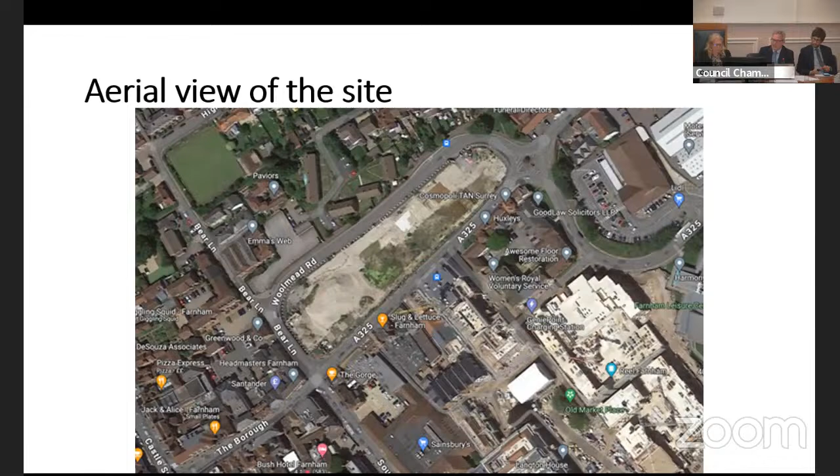As a result, amendments have been made, and these are the proposed amendments to the 106, to the deed. So what we have in front of you all are hard copies of the plans that have been agreed by the district, working with our county council colleagues, county highway colleagues, also Crest Nicholson, but also working with Farnham Town Council and the Farnham Society over how it all works.

These bullet points in front of us are the changes in the deed itself: relocation of the bus stops, widening of the footways to 3 metres in areas and an associated narrowing of the highway, in what will be a one-way system running east-west through East Street, provision of cycle parking for 16 cycles, provision of a 2-metre loading strip for delivery vehicles, retention of the existing controlled crossing, provision of new signage, which you'll see in front of you on the last sheet, and the reinstatement of yellow lines and/or white lining.

We got a late submission, it's in the report, from Farnham Town Council. Farnham was saying, as part of the site, the western part is adjacent to the conservation area — could we have narrow yellow lines on that? County said yes, not a problem at all. That will be part of the contract, so it's narrow and in keeping with the yellow lining in the conservation area.

And the last one is for Waverley Borough Council ourselves to actually determine the design of the bus stops, and that's going to go in the 106, in the deed itself. So those are the changes — that's what you're looking at today and what you're voting on in terms of the deed to the 106.

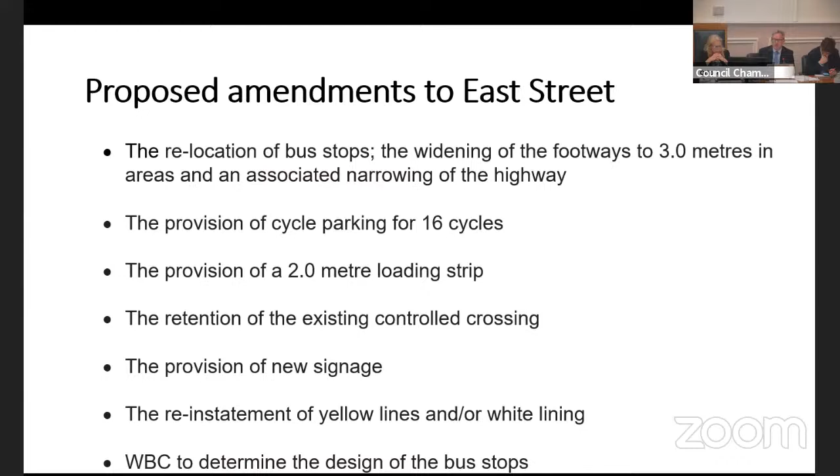So the plans themselves — this is the first plan, number 100, P15. The thing is, on screen it looks blurred, but the plan in front of you is very clear in terms of notes and what and where it is.

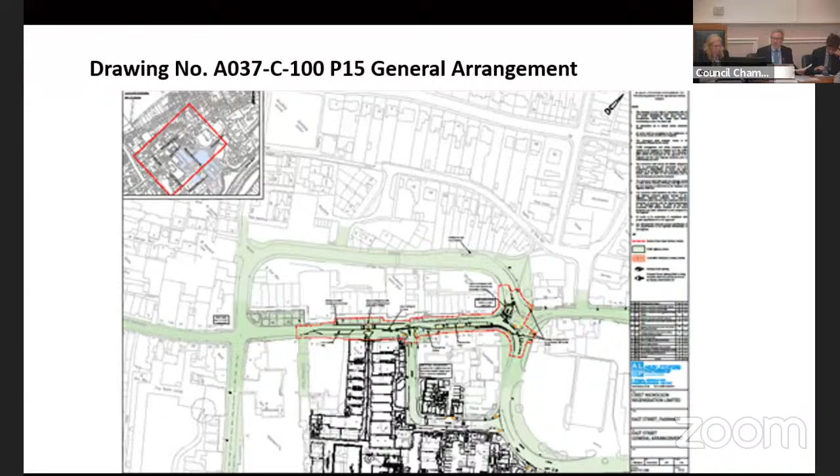It's just the general arrangement, the east-west movement of traffic, and basically where things are in terms of pedestrian crossings. Now, there was an issue on design. The original S106 had an arc with paving on the highway. This has been reincorporated, reintroduced as part of that development, and all these drawings show that. When you're walking out of Brightwells, this is going to be in front of you, so it was important to consider and retain. That's 100 P15, the general arrangement plan. All these plans will be listed in the deed.

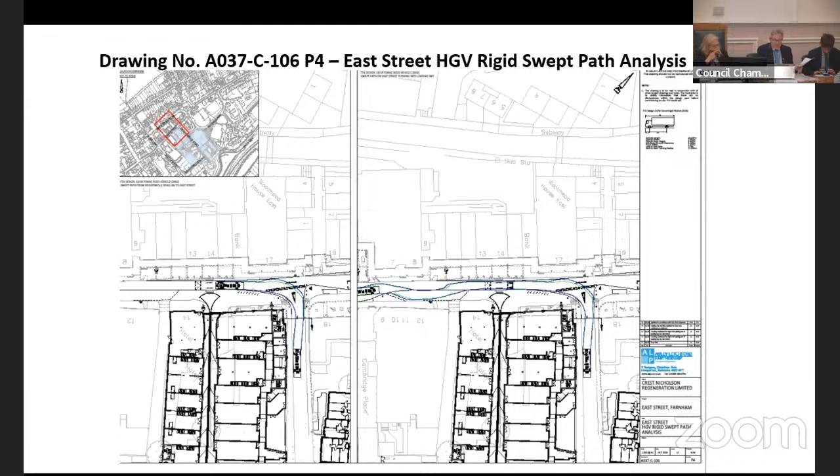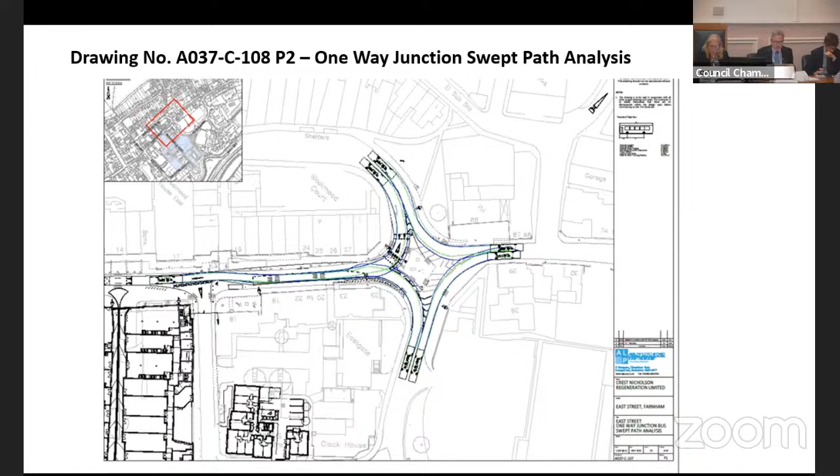The next plan is the rigid swept path analysis, basically proving that a large vehicle can turn safely from Woolmead into East Street, and those plans show exactly that and how that works. The next plan again is large vehicles turning round through Dogflud, way through Woolmead and onto East Street. There won't be any clipping of any curbing, no buildings will be hit. It's quite safe, and it's a one-way system through East Street. The next, the levels and contours, again they'll work. They've been re-engineered.

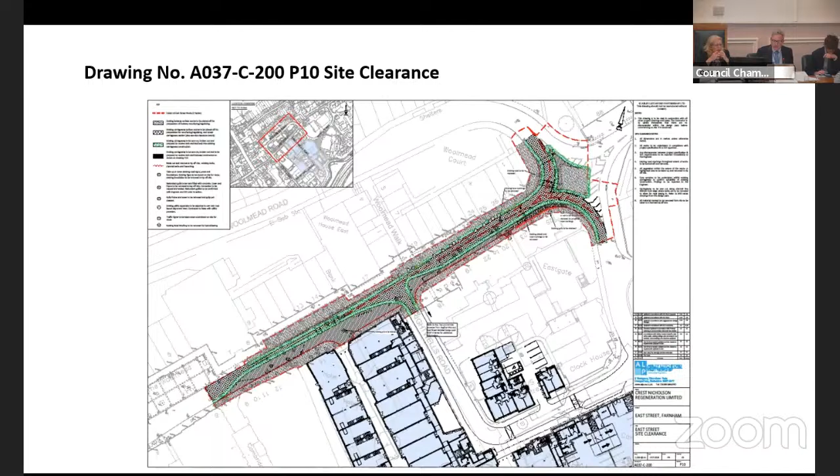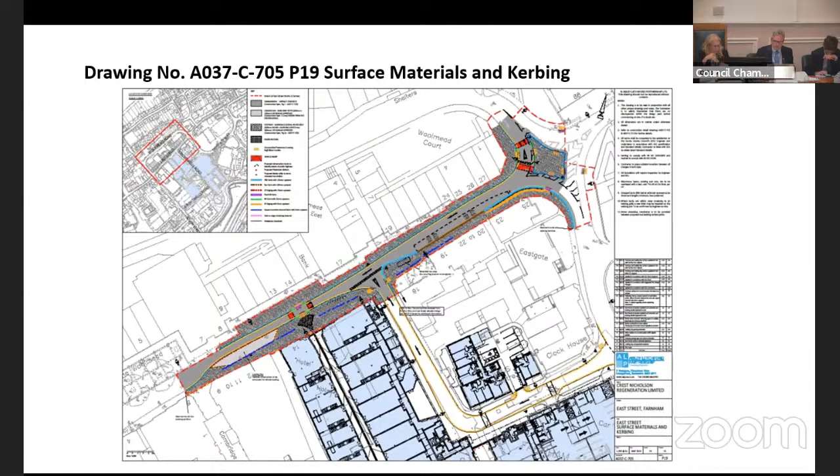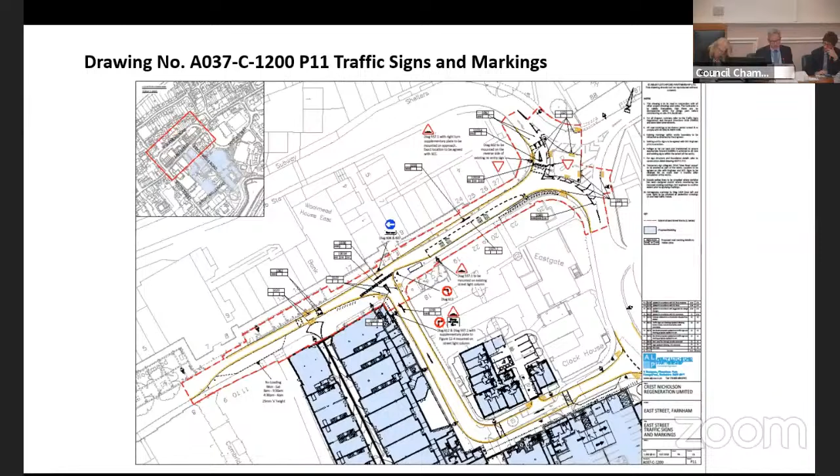Site clearance, drainage layout, which is important as well, where the drains are going and how it works, and connections. Surface materials and kerbing. The legal general arrangement for lawyers like Lewis on my left, how that all works. And the traffic signs and traffic markings for road users, both vehicles, cycling and walking safely, and what they are and how they work.

And the next, it's just the issues. This scheme is an integral part of the Farnham Infrastructure Programme, so the town centre improvements, including strategic changes to traffic junctions and traffic flows. As part of the submission, an updated traffic assessment was submitted, an updated air quality report has been submitted, and an updated noise report, which have been compared with the findings of the original environmental statement in the EIA Statement of Conformity, which has also been considered and submitted as part of the application and found to be acceptable. That's everything, Chair. Thank you.

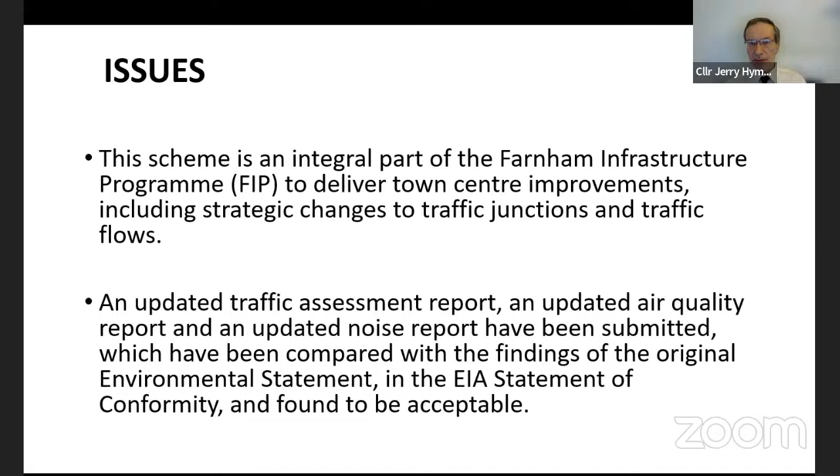Thank you very much indeed, Madam Chairman. This is not complicated. The application is a subsequent application for EIA development. It's a fact, but it hasn't been advertised and consulted upon as such, and the Brightwells environmental statement isn't available, hence the law prohibits the granting of consent.

Of course, the main purpose of the S106 variation is to secure measures to mitigate the highways impacts of the Brightwells housing and retail development, but no such mitigation is proposed. It instead removes the promise of high quality pedestrianised public realm, improved accessibility and a cycleway, to replace it just with a promise of traffic congestion so severe that it'll force residents to walk and cycle regardless of their needs or the weather. It needs the due EIA scrutiny.

It's not just a technicality. We all want better pedestrian conditions, but Farnham needs alternative routes first. The application officer report here makes it clear that this proposal is an integral part of the Farnham Infrastructure Programme, for which the detailed design is still awaited, and which proposes harmful impacts that themselves require mitigation, which is yet to be identified. To permit Brightwells without mitigation, frankly, would be madness.

Hence, we find ourselves in a position where the impacts of the proposals, particularly those on traffic, air quality, emergency service response times, bus timetables, and perhaps most importantly, the viability of local retail and service businesses, have not been assessed in a properly updated environmental statement, as the law demands.

So the SCC position and the officer report state their reliance upon Surrey Highways' claim that the combined East Street and FIP proposals have been satisfactorily modelled in Paramics, yet they won't demonstrate the modelling. Remarkably, the new transport assessment, which was published only last Wednesday, makes no mention of the modelling whatsoever, instead merely pretending that there will be no impact.

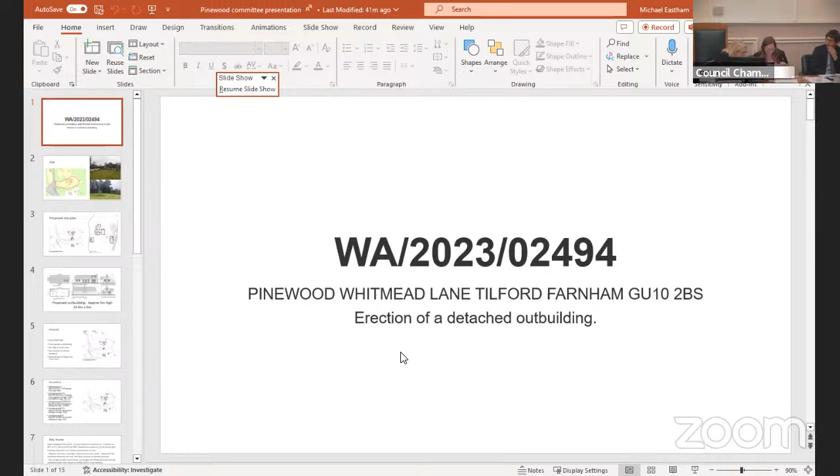We move to the next application, which is WA 2023-02494, land at Pinewood, Whitmead Lane, Tilford. Anna, this is Anna's first planning meeting, so please everybody be very kind. Outbuilding. Oops, thank you.

So it's in the green belt, and the site is outlined in red, and shown are the existing buildings, the house and the garage. The garage is shown in the photograph at the top. It's 5.2 metres high and 7 metres by 9 metres, just to gauge the scale there. The proposed building is about 5 metres high and 14.6 metres by 6 metres, proposed in this position in front of the mature Scots pines here.

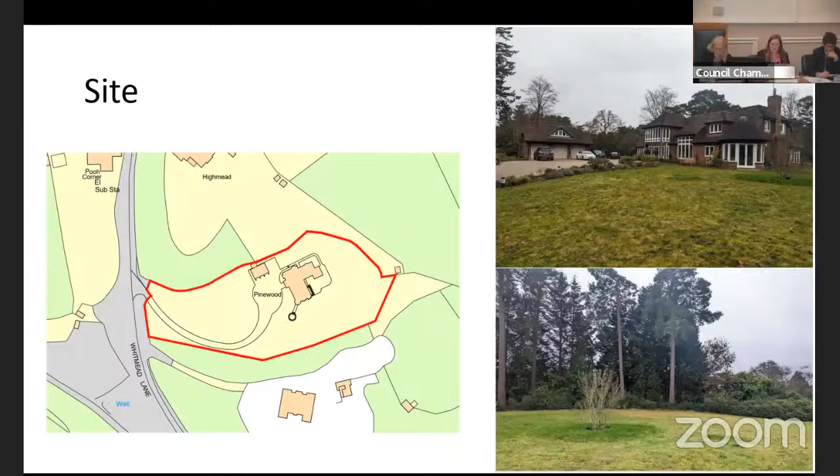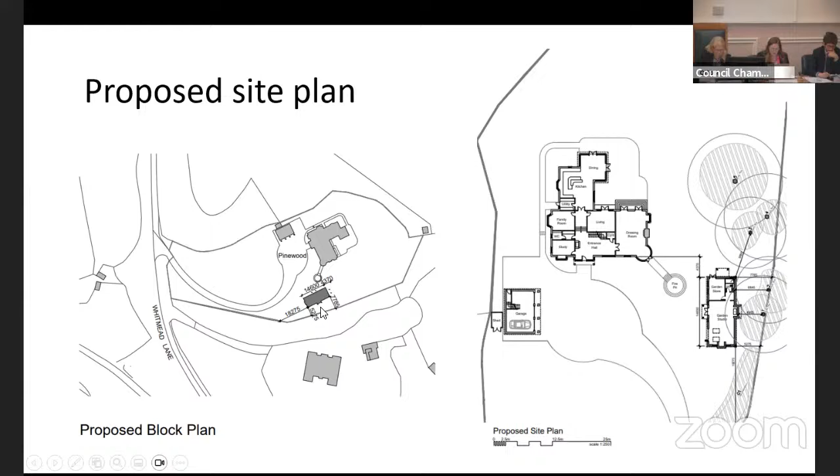There has been submitted an arboricultural impact assessment, which concludes there would be no impact on the trees. This is the proposed site plan - the building is proposed in the front garden opposite the garage there. This is the proposed building, so it's 15 metres across the widest part of the roof here, and then about 1.8 metres projecting log store, and also a projecting open porch.

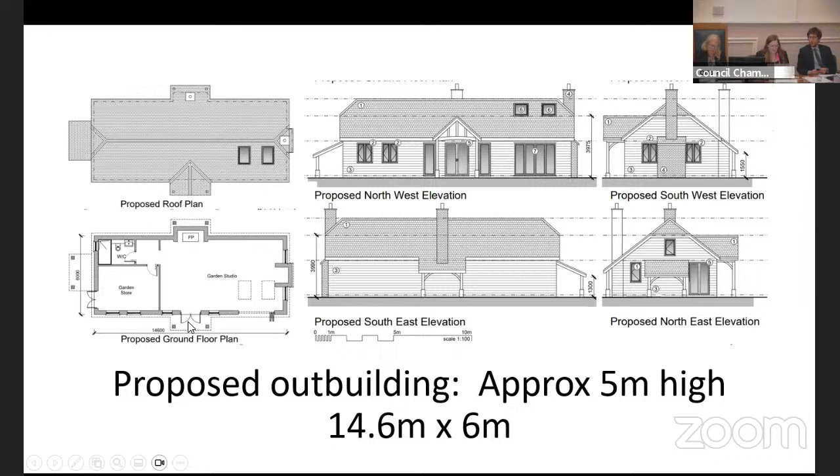Inside there's a garden store which is accessible internally, and through an external door, a full bathroom, and a larger garden studio room with 2 fireplaces and 2 access doors.

So the history of the planning on the site - there is a refused application which is very similar to the proposal, almost exactly the same position and the same building, also 5 metres high. Like the application proposal, the planning application measurements given were 4.91 metres in height, but that seems to be from the finished floor level. It scales at 5 metres from ground level. And that was refused because of the impact on the green belt - so that one was 5 metres high.

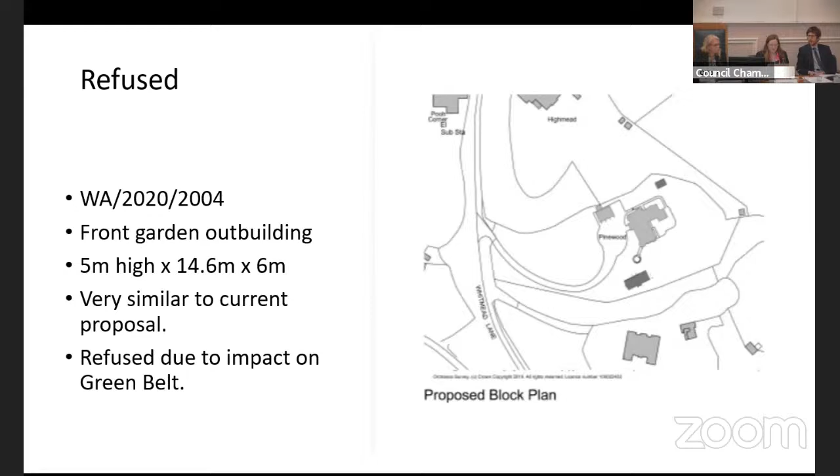There are also a number of permissions on the site, planning permissions and certificates of lawfulness. Firstly, the triple garage, which has been implemented on site, 5.2 metres high and 7 by 9 metres. There is an unimplemented certificate of lawfulness for 2 buildings, one of which is similar to the proposal, but it is only 4 metres high and would have been situated in the back garden. Also included in that certificate of lawfulness was a second smaller outbuilding in the back garden.

There is then an unimplemented and expired planning permission for a large building in the front garden. That's shown positioned here. It's similar to the application, but only 4 meters high.

Subsequently, a further certificate of lawfulness was applied for a further building in the rear garden, 7 meters by 7 meter L-shaped, in approximately this position.

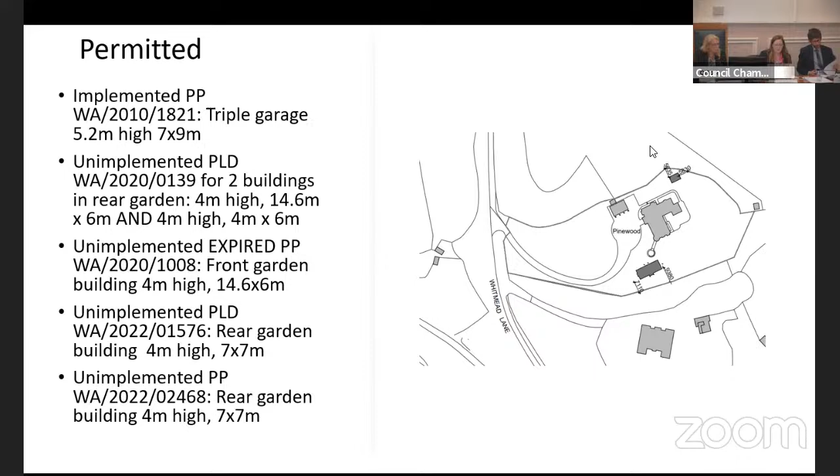And subsequently to that, a planning permission for a similar building, similar proportions, but it had a veranda, so required planning permission, and that was granted.

So the key issues are it's a new building in the green belt. National and local policy is that new buildings are not appropriate in the green belt unless they are a specific type of development listed as an exception within paragraphs 154 and 155 of the NPPF, which it is not, or unless there are very special circumstances, which in this case there is not. The planning authority must therefore refuse the application in line with the policy unless there are material planning considerations which indicate otherwise.

Due to the high quality construction and design and the siting within the residential plot, there would be little impact on the AONB, AGLV or visual amenity. The arboricultural impact assessment concludes there would be no detrimental impact on the nearby mature Scots pine.

These are neutral factors that you'd expect of any proposed development. They're not mitigating factors weighing in favour of the development. So the recommendation is for refusal on the basis of harm to the openness of the green belt.

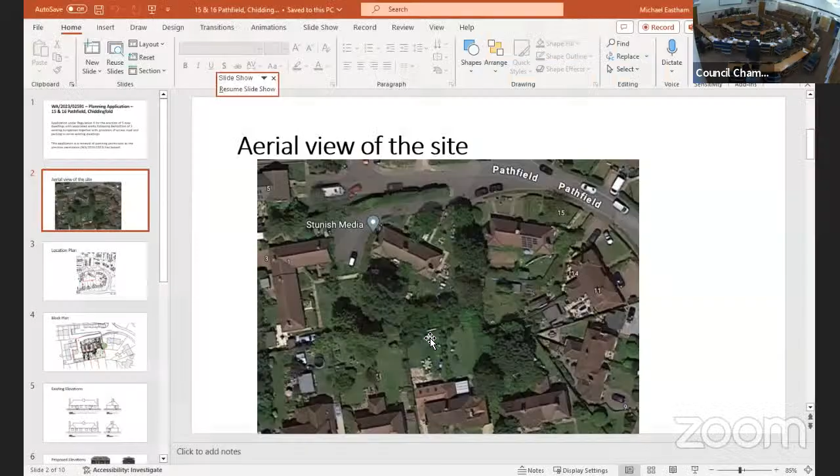So this is a Regulation 3 development. This is the district council, the borough council itself as a housing provider providing development. So the description will be amended when the decision goes out. It's a Regulation 3, one of our own developments working with Feltham Construction, the contractors. This is a renewal of planning permission. The planning permission lapsed, so everything you see today has been rehearsed in the past. And it's a win-win for everybody — 5 affordable houses in Chiddingfold in terms of housing need.

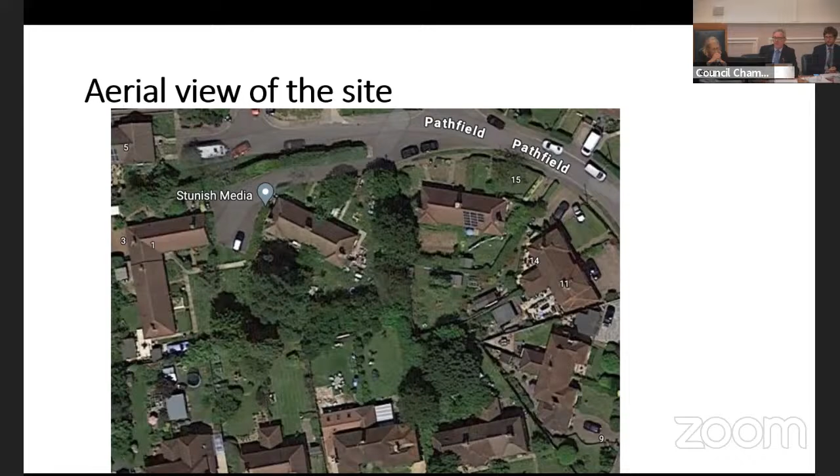The site itself is here. It's basically these 2 bungalows, 15 and 16, which will be demolished and replaced by 3 houses, almost like townhouses, and 2 apartments. The flats look like a house, 2-storey, so 2 flats, one on the ground floor, one on the first floor. This is the site itself, just off Pathfield in the corner.

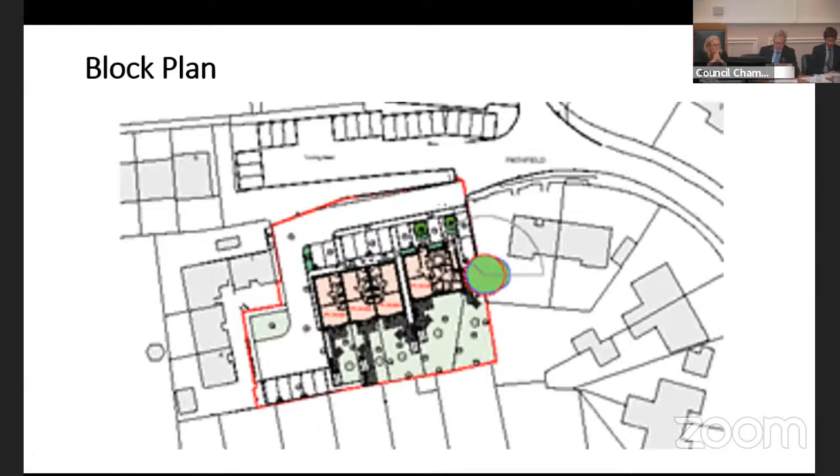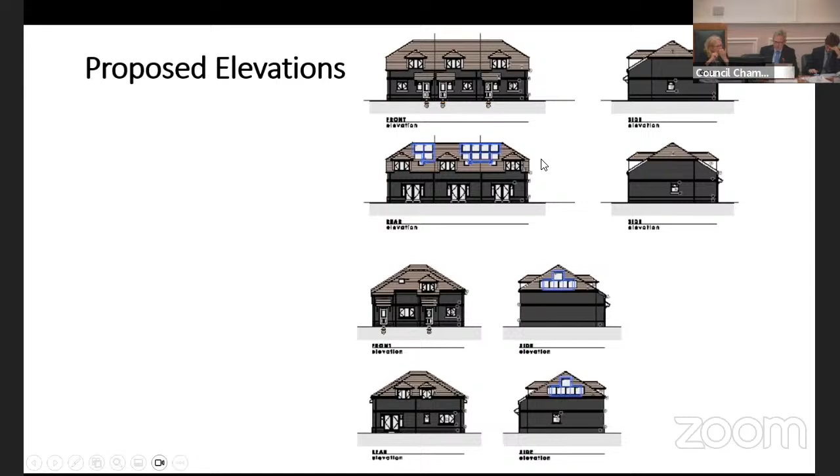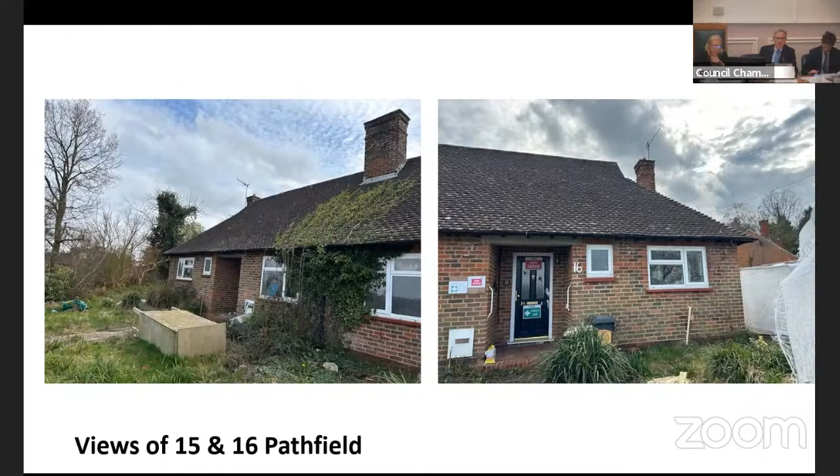Provision of 5 new affordable homes, redevelopment of a brownfield windfall site in the village of Chiddingfold. It's a renewal of the permission that's lapsed, which was in 2019, so it's pre-COVID. So it's proposed as a mix of 3 2-bedroom 4-person houses, 1 2-bed 4-person ground floor flat, and 1 1-bed 2-person first floor flat, replacing 2 bungalows.

So the council is supportive of smaller units, which will make better use of council's assets and increase the council's capacity to meet housing need. So it's basically renewing an application for much needed housing in Chiddingfold, ma'am.